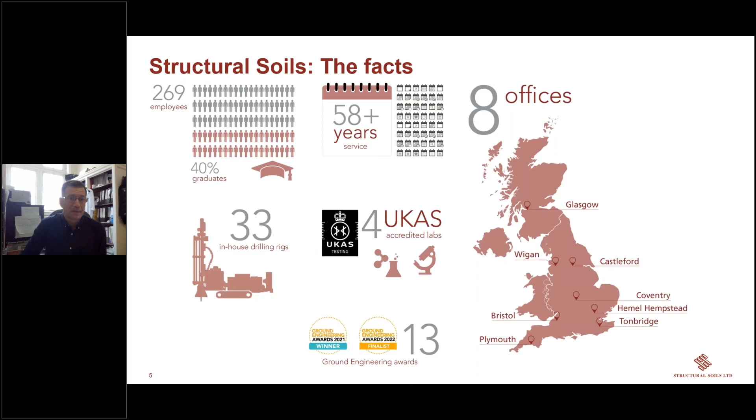So we have 8 offices in the UK, stretching from Plymouth to Glasgow, and we have 4 UKAS accredited laboratories, Bristol being the largest, then Castleford with a materials testing laboratory and our Red Lab, Hemel Hempstead, and Tonbridge.

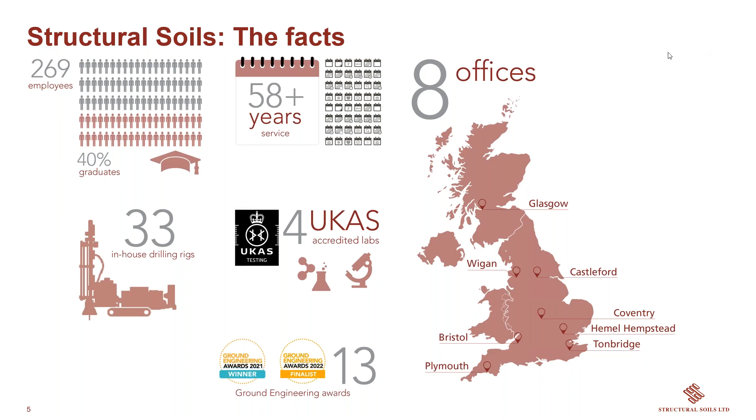So we have a number of in-house drilling rigs, but we've also got the resource of our RSK sister companies who've got a number of other drilling rigs as well for our use. Here's just a bit more of a spread of where our drilling resources are. Feel free to contact us at ask@soils.co.uk for any rig availability that you may require.

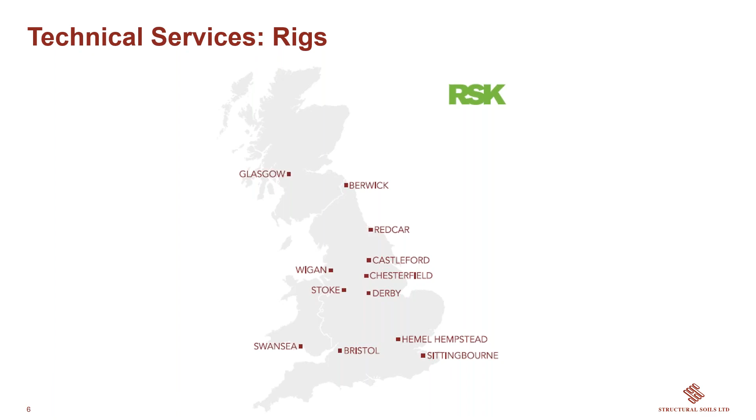We're very proud to be part of a number of association bodies: the British Drilling Association, Achilles, AGS, RISQS. All of these are very useful for our clients, so that they can be assured that we are independently audited on a number of our operational aspects.

Now I'm going to hand you over to Sinan to talk about our geologging service. Thank you, Eric.

Maybe to start with a little bit about my background. I have been working for Structural Soils for the past 22 years, but before that I spent about 18 years in the academic field before I moved on to the industry.

Perhaps some of you might be familiar with geologging. This presentation summarizes the application of the geologging tools in ground investigation.

My first involvement with downhole geologging, or geophysical logging, was in 2008, when Structural Soils carried out a comprehensive ground investigation for Hinkley Point C nuclear power station. Since then, I have been involved with geophysical logging on a number of large and strategic projects.

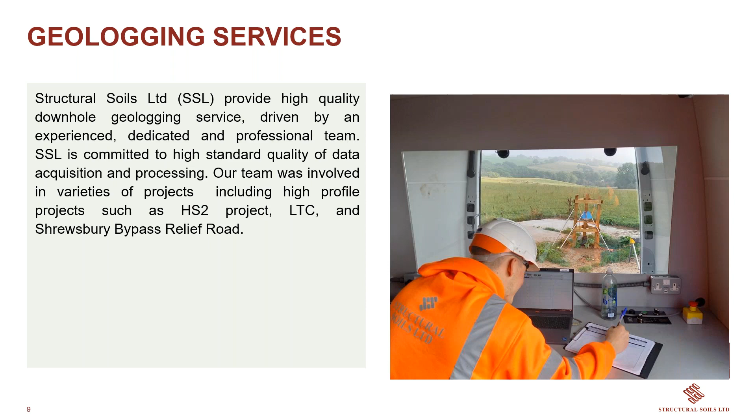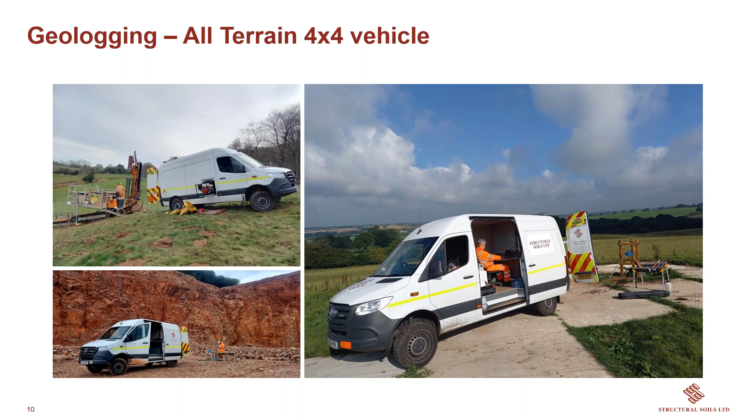We usually operate from a four-wheel drive van if the access is suitable, or without a van if the access is not suitable, using the mobile winch instead.

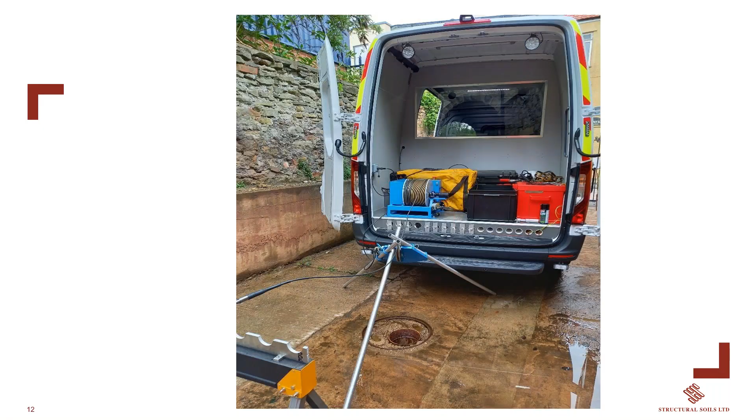All our tools are calibrated in a dedicated borehole at Structural Soils premises. The calibration is usually carried out before undertaking any site work. All the tools and the process of conducting the logging comply with the requirements of the American Society for Testing and Materials, that is ASTM D5753, planning and conducting borehole geophysical logging.

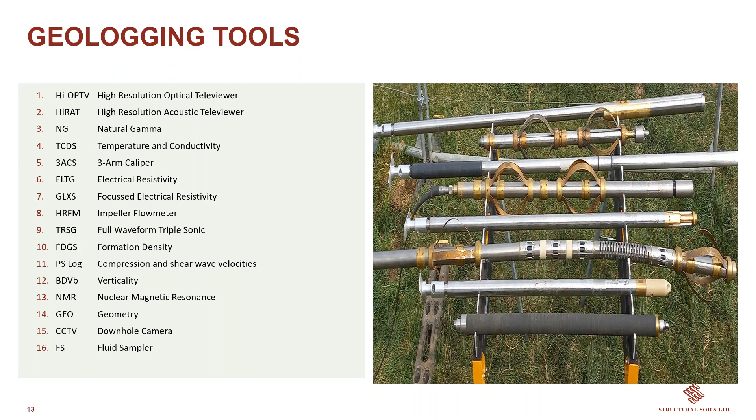These are the geologging tools. We normally carry them in a special adaptable geologging van. I will be discussing the use of these tools in more detail.

Or wrapped back into cylindrical form to form a virtual core. All the bedding, joints, and fractures can be identified and displayed on the image, including inclination and orientation, using the WellCAD software and adjusted by an experienced engineer.

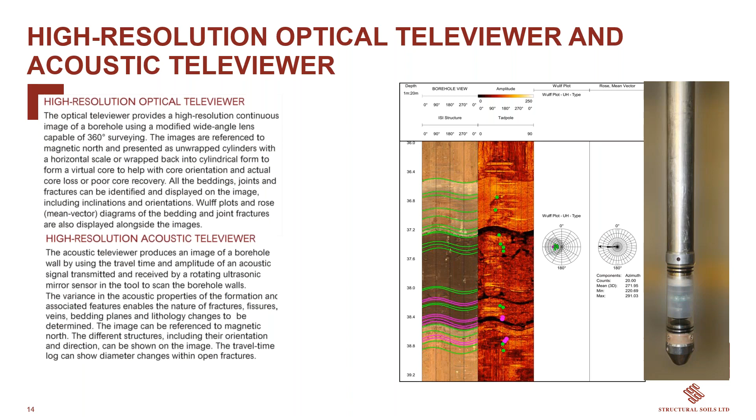Next, the acoustic televiewer, this is the second column. The acoustic televiewer uses the travel time and amplitude of an acoustic signal transmitted and received by a rotating ultrasonic mirror sensor. It's usually displayed side by side with the optical televiewer. Sometimes, when the optical log is not clear enough because of cloudiness of the water, the acoustic log can be used as an alternative.

The variance in the acoustic properties of the formation and associated features enables the nature of fractures, fissures, veins, bedding planes, and lithology changes to be determined. The different structures, including their orientation and direction, can also be shown on the image. You can see these dots, the green and pink dots—these represent these discontinuities.

The caliper tool is a 3-arm caliper used to measure the precise diameter of the borehole continuously along the whole length. The tool is used to check and identify zones of washout, collapses, highly fractured areas, and open fissures.

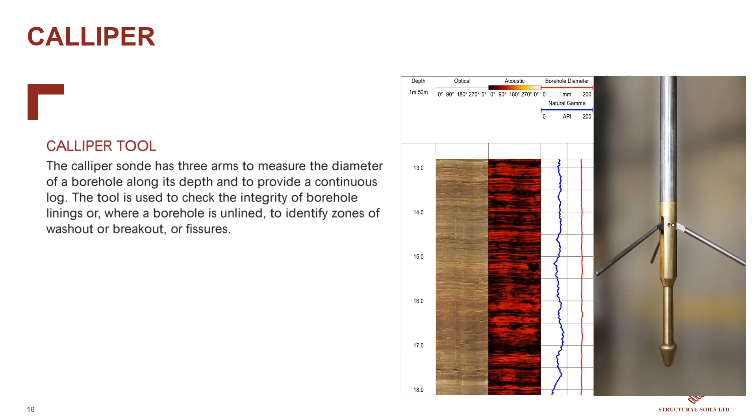Verticality measurement is actually very important for advanced geophysical surveys in boreholes, that is downhole geophysics and crosshole geophysics, where the verticality is very important for the borehole to be calculated. This tool measures the verticality and provides a continuous log of the borehole using accelerometers and magnetometers to measure its inclination, that's the tilt, and direction, that's the azimuth, and you could see it displayed on the same log.

It should be noted that the measurements cannot be undertaken in a cased borehole. The tilt is red, I'm not sure if you can see it, it's very small now. And the azimuth is blue. You can see the changes in this section of the borehole.

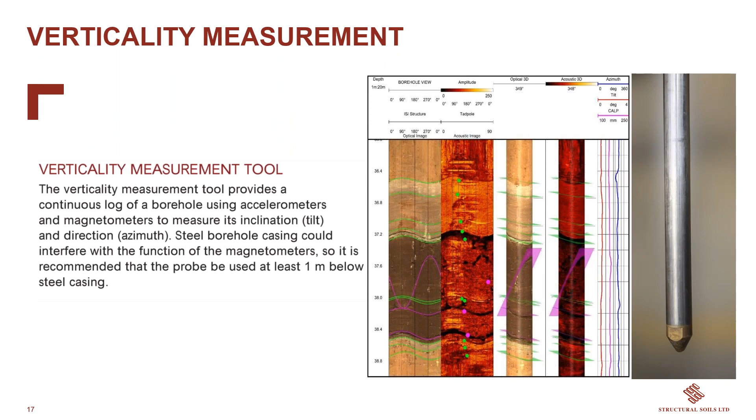Natural gamma, fluid temperature, and conductivity. This tool measures the naturally occurring gamma radiation found in rocks and sediment. It also measures fluid temperature and fluid conductivity.

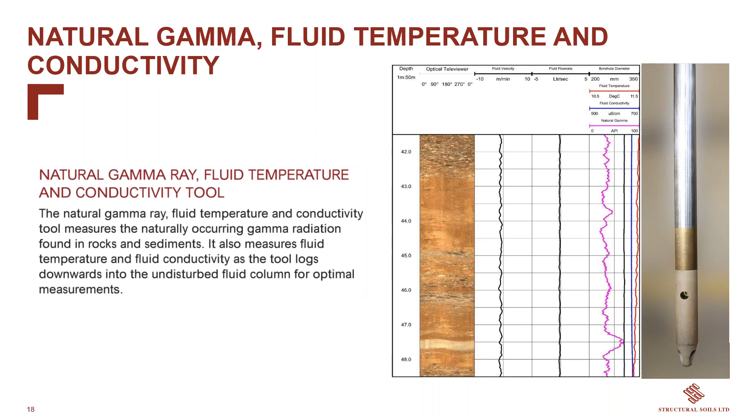Natural gamma log is also used to identify changes in lithology along the whole length of the borehole. In this example from Stowfield Quarry in Wales, we can see the borehole to the left where the televiewer is clear and we can recognize the lithological changes, while the borehole to the right is relatively cloudy, but with the aid of natural gamma log, we can identify the lithological changes.

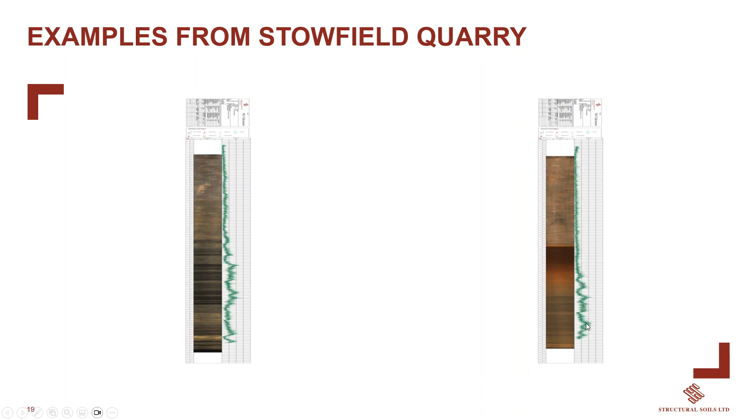Nuclear magnetic resonance. This tool is widely used in the oil and gas exploration industry since it was developed in the late 40s. Later, it was introduced into geotechnical ground investigation. It is based on the magnetic resonance phenomenon, and basically it is similar to the MRI used for medical diagnosis.

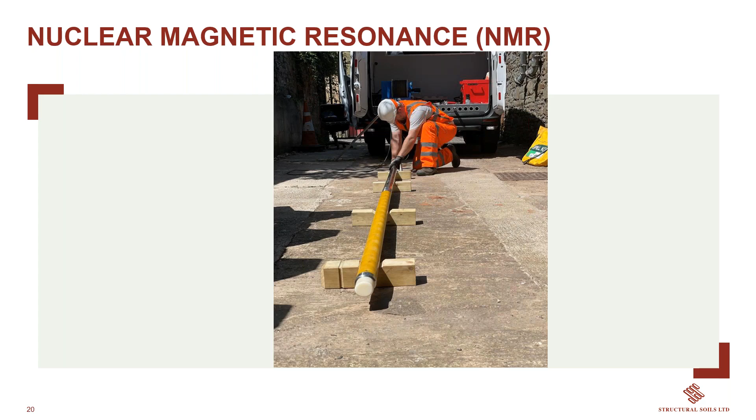The NMR tool provides permeability in 3 models, as well as transmissivity in 3 models, and porosity. In addition, it also provides pore water geometry. The data is provided in increments of 25 centimeters along the whole length of the borehole, enabling a precise assessment of permeability and characterization of the formation strata.

I think the log here is maybe too small to read the detail, but the last column has a red line that shows the porosity, and you can see how it changes. The next column shows the permeability in 3 models, and these 3 models vary slightly but in general can give a very accurate and precise permeability. The third column is the pore water geometry, which includes clay water, mobile water, and capillary water.

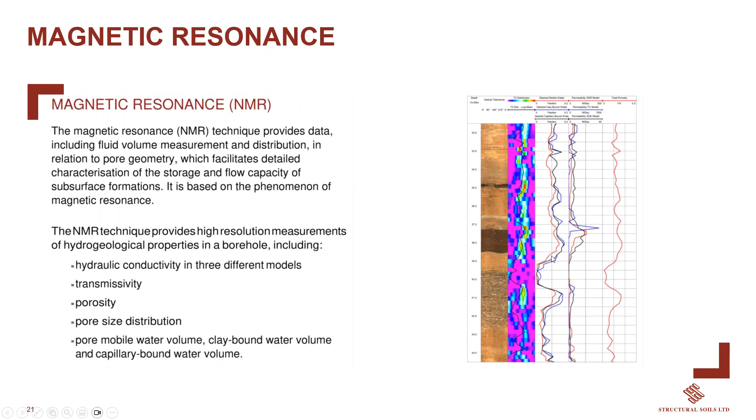The NMR log can be output in a different format to display the pore water geometry in more detail, which includes clay fluid volume, capillary fluid volume, and mobile fluid volume. That is the first column, which is colored, and you can see the changes relative to the next column, which is the permeability. Also displayed on the same log, in the last column, is the transmissivity, presented here in 3 models as well.

The data provided have a wide range of applications, including hydrogeological investigation, groundwater resource management, aquifer storage and recovery, site and aquifer characterization and assessment, and abstraction well design.

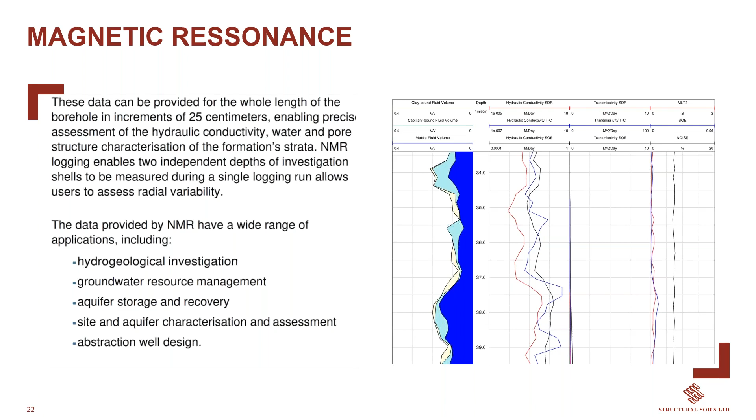The impeller flow meter tool is used to determine the groundwater flow pattern and direction within the borehole, in addition to the fluid temperature and fluid conductivity. It can also identify casing leak zones.

Now, on the log, the last column displays the natural gamma, fluid temperature, and fluid conductivity. Next to that column, the 2 black logs are the fluid velocity and fluid flow rate. These 2 logs, if they are positive, it means downward flow. If negative, it means upward flow. So it's easy to detect that.

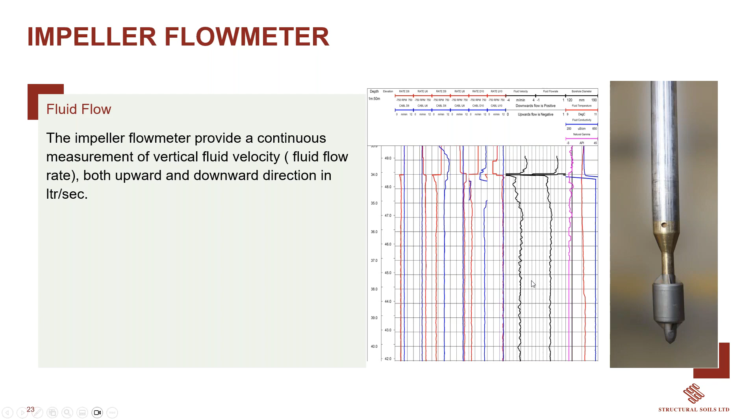This tool is very useful to obtain the elastic properties of the rocks, including Young's modulus of elasticity and shear modulus of elasticity, in addition to the Poisson's ratio. The tool includes hammer source that operate under surface command and produce a tube wave at the borehole wall to generate the longitudinal wave, P wave, and the shear wave, S wave.

It also includes 2 receivers, containing 2 transducers. On the log, you could see the last log in green, that is the Poisson's ratio. Next to it in blue, that's the bulk modulus. Next to it, the red and black is the Young's modulus of elasticity and the shear modulus. And the last column shows the VS and VP. The first is actually VP divided by VS, and the second is VS in meters per second, and the VP is meters per second. In addition to that, we also provide density.

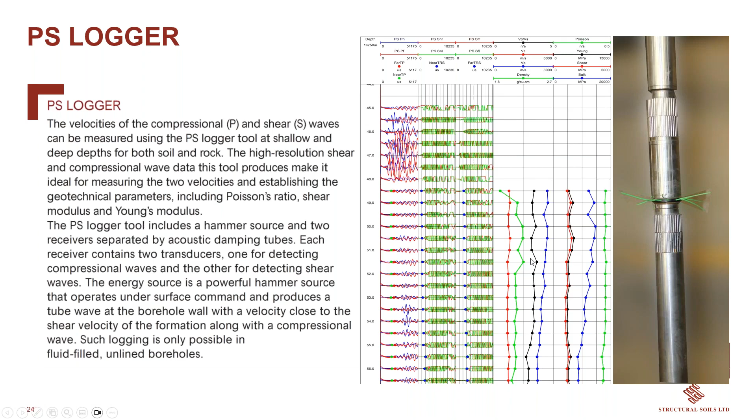Next, full waveform sonic. This tool used 2 transmitters and 2 receivers to generate the P and S wave, which is a different technique from the PS logger, the previous one.

This tool is useful if there is installation in the borehole. It is mainly used to assess the integrity of the cement grout or bentonite cement grout or bentonite grout, and identify bridging or deficiency or gaps within the grout and the bonding between the grout and the steel or plastic pipe in the borehole.

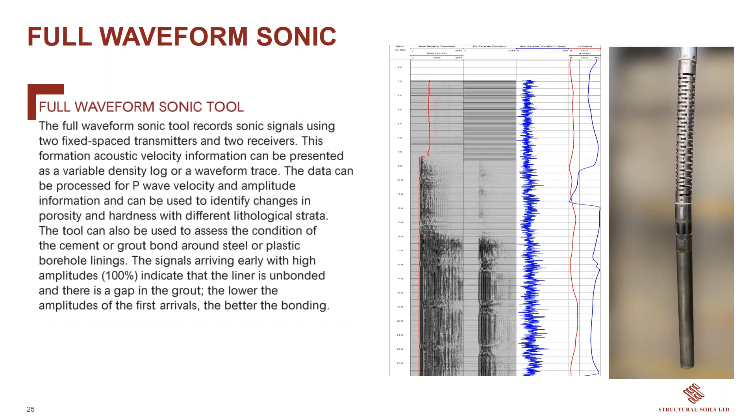Next, formation density. This tool provides the bulk density. It uses 3 double shielded detectors at different spacing from a gamma radiation source. The high resolution density and bed resolution density in counts per second are also recorded and displayed on the output. We generally follow the rules and regulations in dealing with the source in terms of handling, storage, and maintenance.

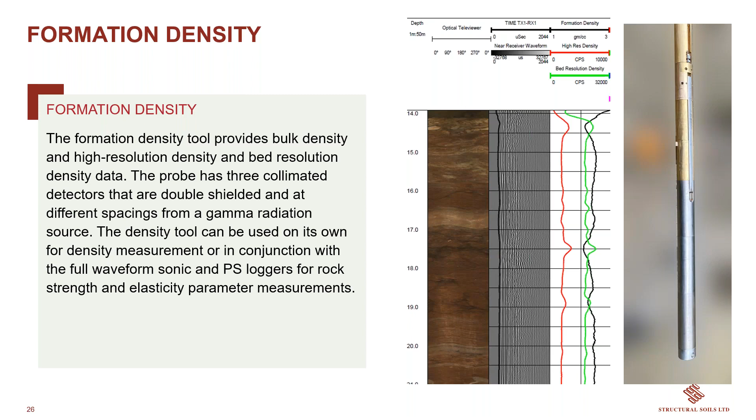Next, downhole camera. This camera is more sophisticated, a high-tech, high-resolution video camera relative to the cameras currently available for downhole investigation. The camera has autofocus facility and frontal 6 adjustable LED lights. It provides usually a full 360-degree unwrapped image of the borehole. Borehole inclination can also be provided, and this can be used to determine the true vertical depth of the borehole.

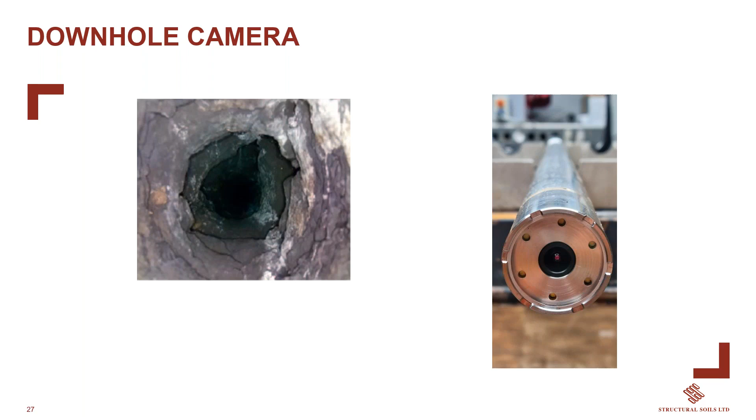Next, the acquisition software package allows extensive operator control, including video resolution, frame rate, shutter speed, lighting brightness, white balance, snapshot mode, with depth and time displayed and real-time video annotations. So there are plenty of facilities in that camera which you could adjust to produce the best image or the best video for the borehole.

It allows screenshots to be captured and text editing while viewing or recording. Where more detail is required, full color snapshot images can also be provided with a zooming function.

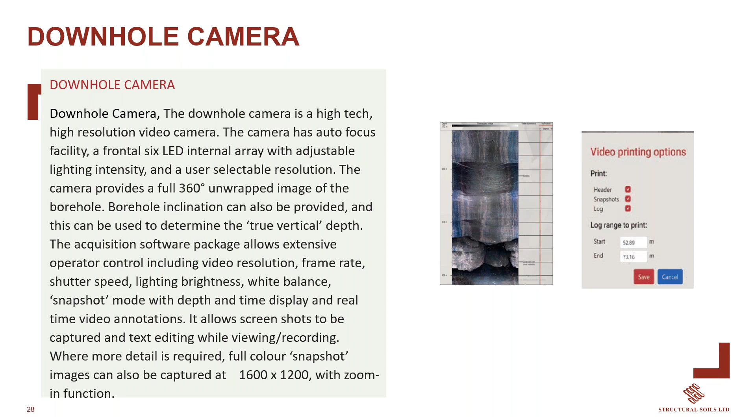Next, borehole geometry. This is an advanced caliper. I talked about a caliper earlier, but that one was 3 arms. This caliper is more sophisticated than the 3 arms caliper, and the tool is supplied with a 4 arms XY caliper in 2 dimensions, which measures the diameter of the borehole along the whole length of the borehole. It can also identify zones of washout, zones of collapse, and highly fractured zones. The data also allows the operator to derive the volume of the borehole or any section within the borehole.

The tool also provides natural gamma.

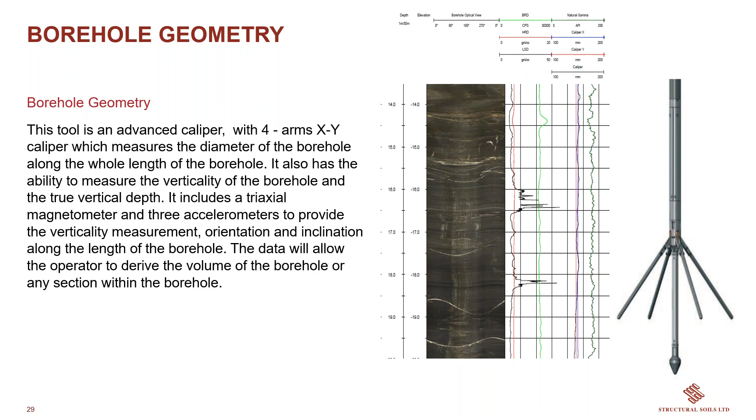Next, fluid sampler. This fluid sampler is different from the water sampler which we normally use in the borehole. It's more sophisticated.

This tool can retrieve liquid samples from different depths of the borehole in a sealed chamber and deliver them uncontaminated to a sample container at the surface. The valves at the top and bottom of the chamber are controlled by a motor control unit at the surface.

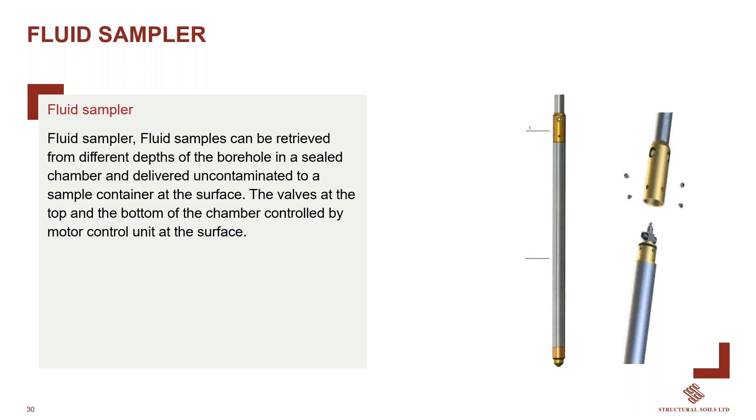Obviously, the geologging logs can be produced in PDF format and can be included in a factual report or provided separately. If a factual report is required, it will include details of the work carried out, the tools used, calibration certificates, and conformity certificates. We can also provide an interpretive report, which includes a complete interpretation of all the data.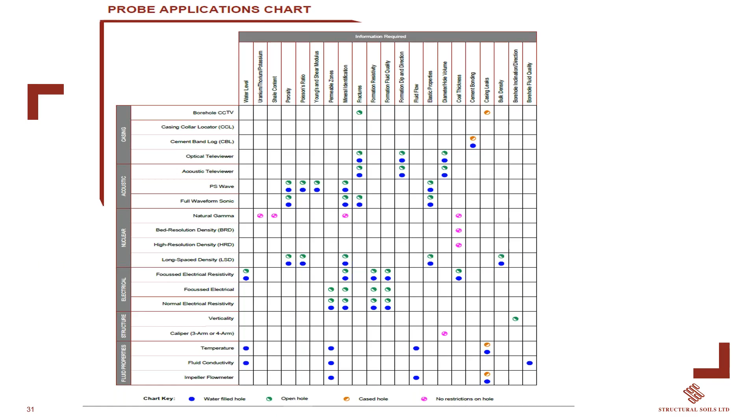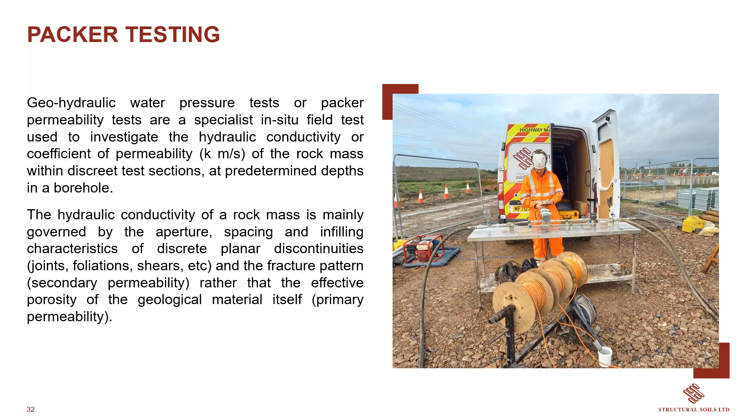Next, in addition to the geologging services, we also offer packer testing. These are the tools used for the packer testing. And this is the output from the packer testing.

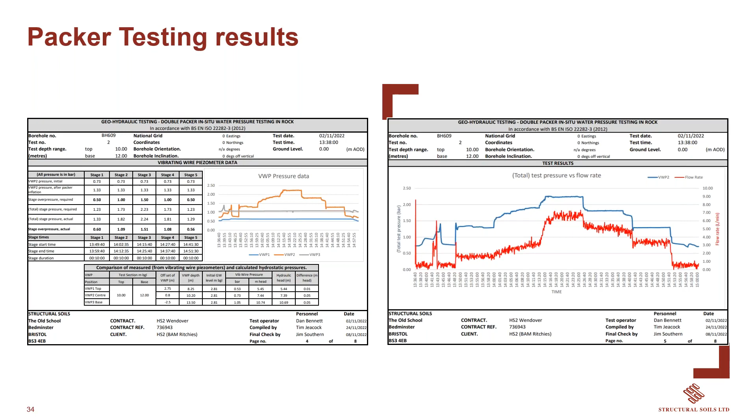We also provide HPD testing services. This is the output from the HPD test.

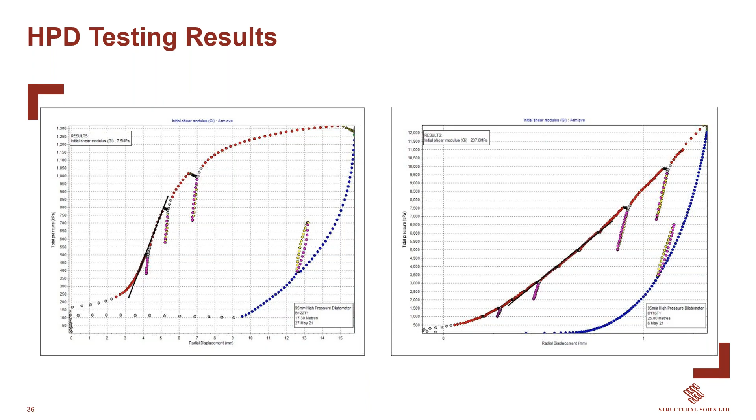Hi, thanks Sinan. This is just a few slides at the end to show you the other services Structural Soils can offer. We have a GIS database of all the information and reports we've undertaken over the last 60 odd years, which is very helpful for any pre-planning of works we may be doing for our clients.

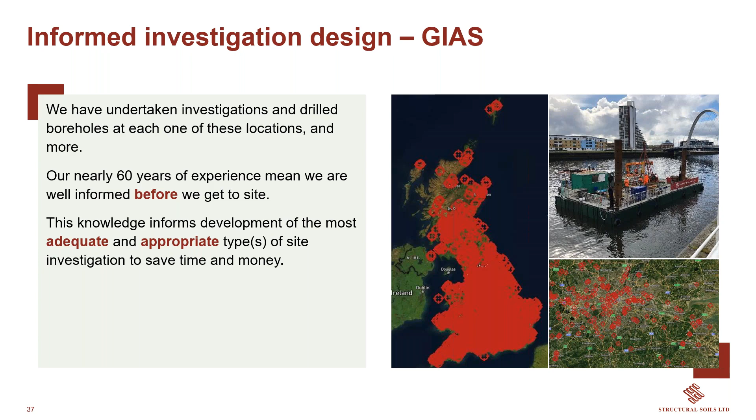One of the things Structural Soils has invested quite heavily in is rotasonic rigs. We've got 3 in-house rigs, very versatile, with different sizes from the 600 series Comacchio down to the 300 series. We can get through the overburden very quickly with the sonic head, and once we hit bedrock, we can go into the rock using the rotary core head. Very versatile bit of kit, happy to talk through that if required.

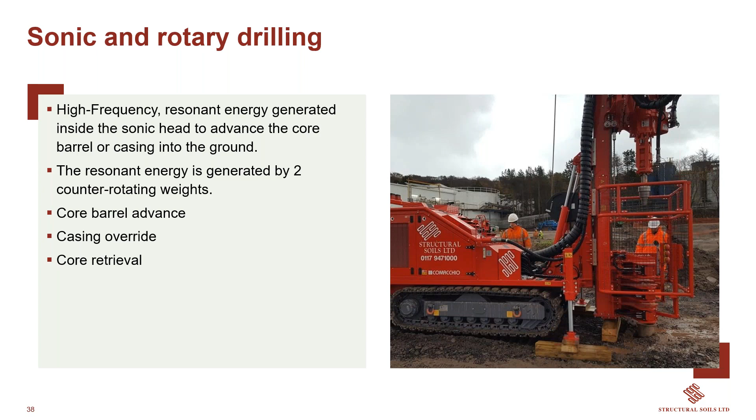Some clients have asked us to go to tricky locations, so we've invested heavily in all-terrain vehicles - our Supercats. We've got 3 in our fleet, one with a window sample rig on the back. This is a site we worked on the south coast to plan flood defense work, an intertidal area, so we had to get in, do the work, and get out as quickly as possible.

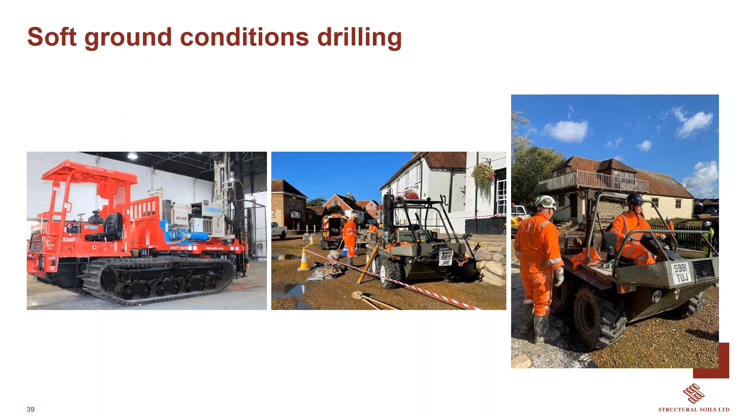The picture on the left is another of our innovations - it's got a rotary rig on the back, one of our Comacchio MC300s. This has a footprint of about 2 psi, so if we can generally walk on the site, we can drill on the site as well. We're happy to talk to any clients about that availability.

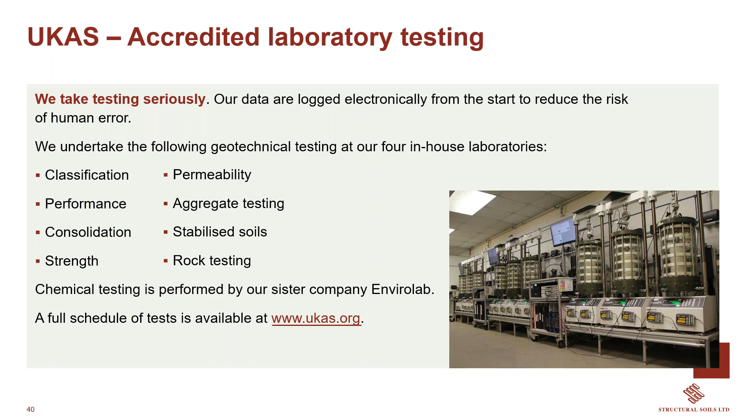We're very proud of our laboratory testing capability. We've got some cyclic triaxials in our Bristol office. We've also got our RED lab in Castleford, and labs in Hemel and Tonbridge, so we'll happily look after any of your soil or rock testing. Any geo-environmental testing gets done by our sister lab, EnviroLab.

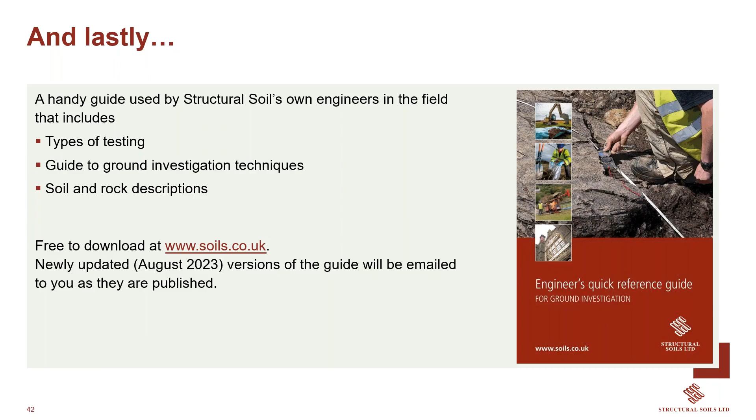Right, so there you are. I've got a couple of questions. The first one, Sinan: would the cloudiness of the water in the borehole affect the geologging output?

The borehole should be flushed with clean water several times until the flush water becomes clean. The hole after that should be left for at least 24 hours before we carry out the logging. The optical televiewer is the only tool which can be affected badly by the cloudiness of the water. However, other tools such as impeller flow meter and NMR might be affected by the cloudiness to a certain limit.

Thank you, Sinan. Another question: can the NMR be used as an alternative to the packer tests? Yes, the NMR is simpler to use to establish the permeability relative to the packer test. It's quicker to run and results can be obtained the next day. Also, the measurement of permeability is deeper in the rock from the borehole wall than the packer test, and you can get permeability every 25 centimeters. It's different from the packer - with the packer, you have a pocket and measure the permeability for that pocket, and progressing this, you actually miss the permeability of the rock between the pockets. So it is different from that.